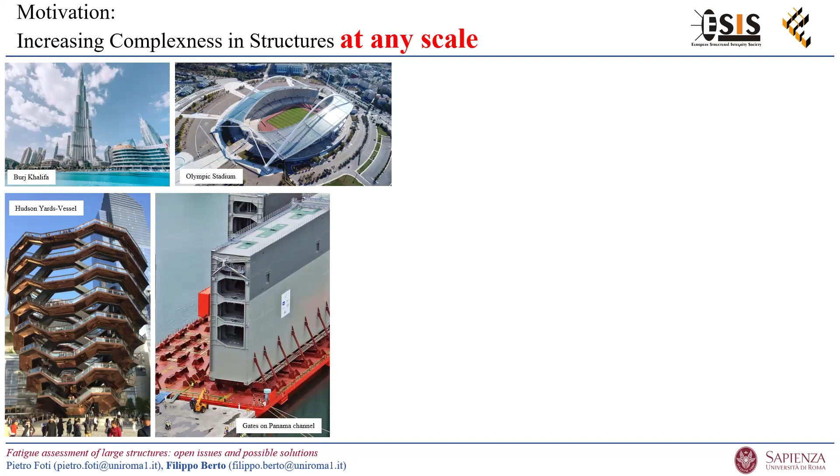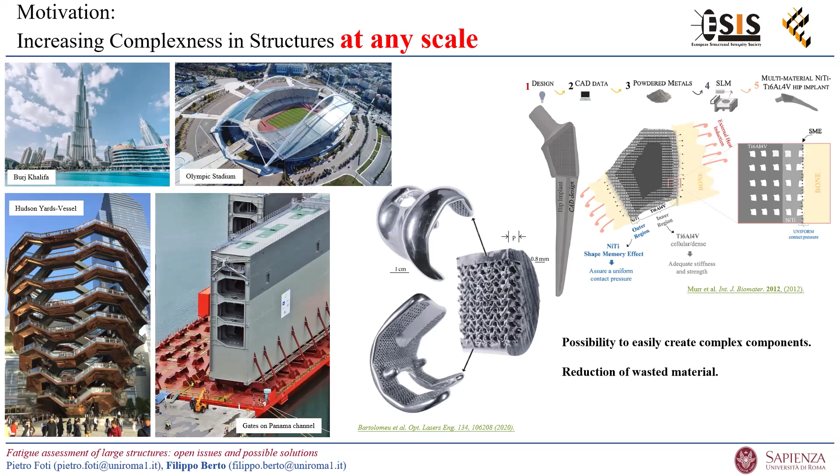Dealing with increasing complexity in structures, I want to mention that large infrastructure now needs to be designed against fatigue, and the standards are requiring this design always more to be efficient and more precise. And this is affecting any scale of the structure, from a very large structure to, for example, very small structures. So fatigue is spanning from large pieces of materials to very small material components. So what we need is the possibility to easily create a complex component, and we need a reduction of wasted materials and an efficient fatigue design for these structures.

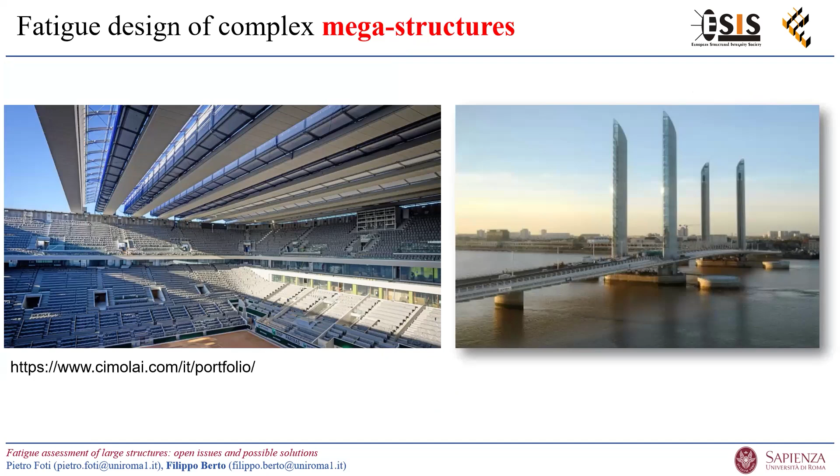So another example of large infrastructure in which I was involved recently was the cover of the Roland Garros stadium, the tennis stadium, that is now able to close the stadium when, for example, it is raining. And that movement is creating a lot of fatigue issues to the structures. And in that roof, there are more than 1,000 weldments to be designed against fatigue. Another example, together with Cimolai, is this large bridge.

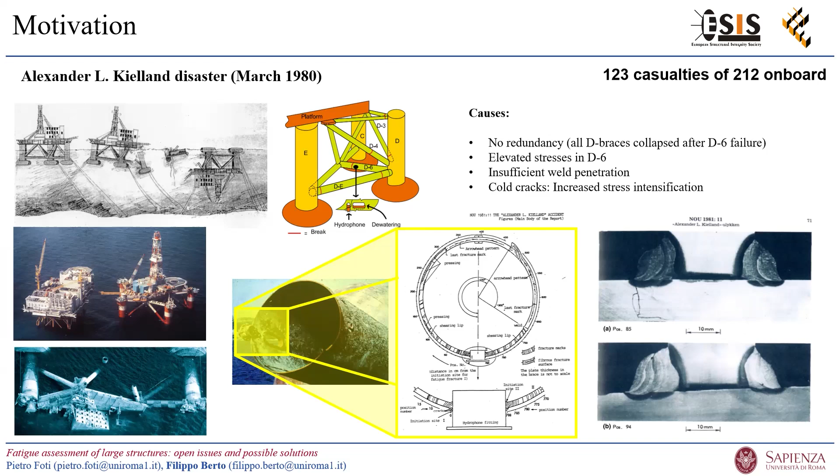And I want to mention also that fatigue is a local phenomenon. We had a very big failure in Norway in 1980, where a large offshore platform collapsed with more than 100 people who died. And this structure was 100 meters in length and collapsed only for the failure of a weld that was a few millimeters inside all the structure. So it means that fatigue design is a very specific and very local phenomenon that we have to treat with special tools that allow us to design the structure properly.

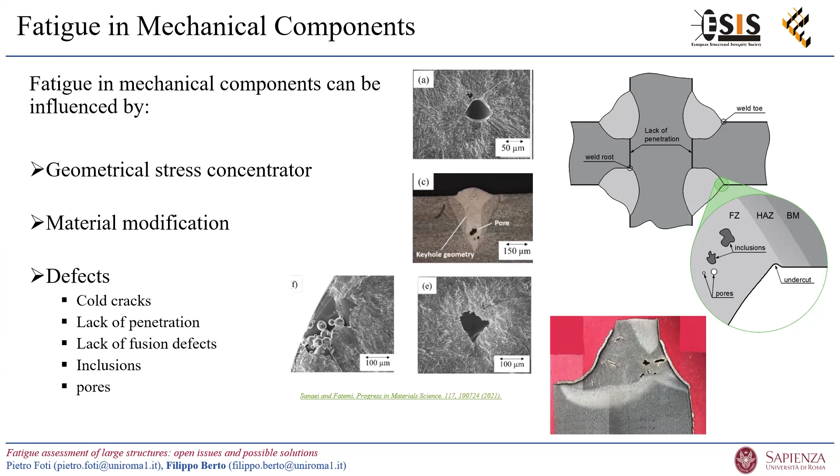Dealing with fatigue in mechanical components, of course, what we are saying for welded structures is also important for innovative materials, because we have the same identical problem, for example, in additive manufacturing, where we have cold cracks, lack of penetration, lack of fusion, inclusions, and pores that strongly affect the fatigue behavior of additive manufactured components. And so everything can be actually translated to those materials as well.

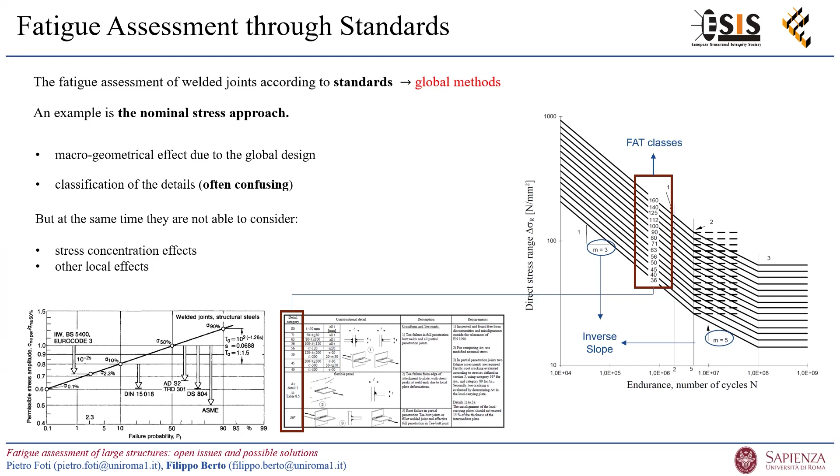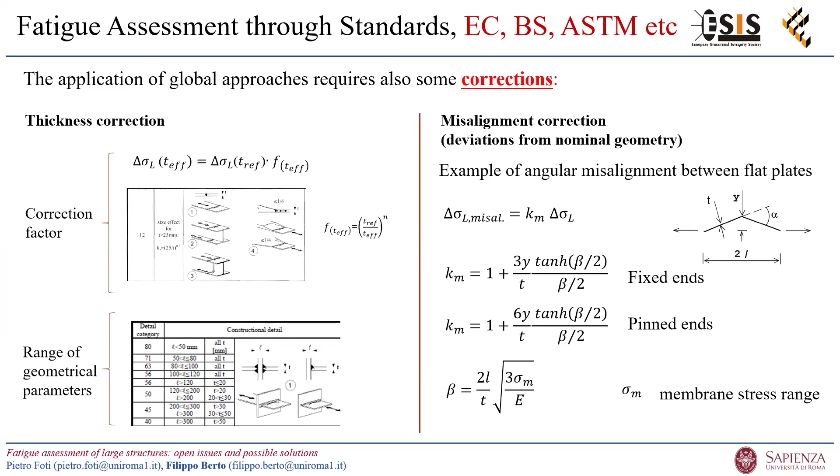Dealing with fatigue assessment through standards, I was involved, for example, in Eurocode 3, and we are almost 30 or 40 years behind the current research. So we are still designing components using a nominal approach, which is really conservative and bad in terms of fatigue prediction. So we are overestimating the fatigue behavior of large structures, and it is very difficult to find the categories of the joint that we want to design inside the Eurocode. It's almost impossible. If you have a complex structure, like, for example, the Roland Garros roof, all the welded components inside the structure do not belong to any category of Eurocode 3. Okay? And also we have a lot of simplifications and corrections that are mainly empirical and depend on the geometrical parameters of the structure. This is strongly inefficient and can create a lot of issues.

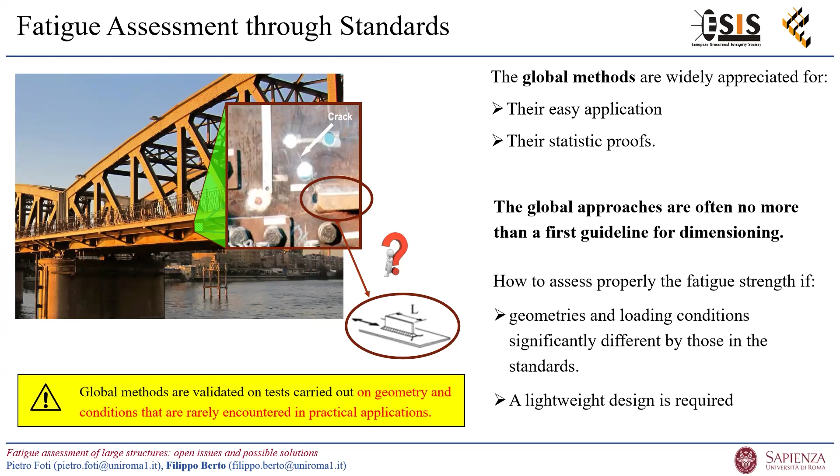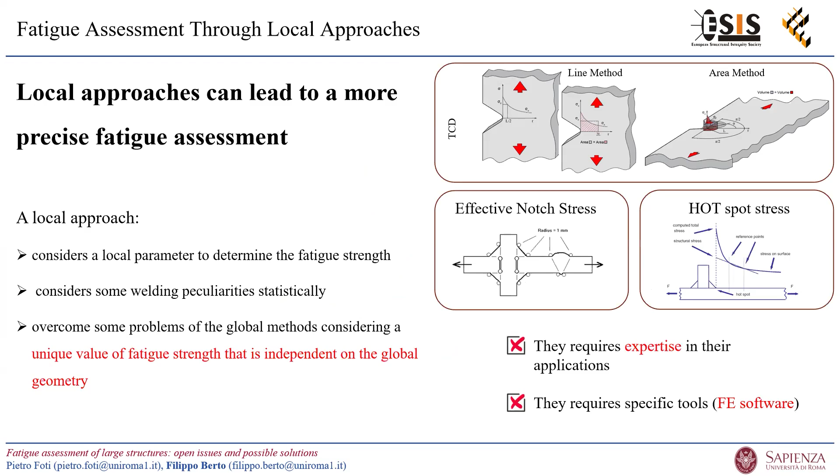I mean, global methods are, of course, widely appreciated because they are easy to apply, but of course, they have a lot of limitations because they do not consider the local geometry of the structure. I want to mention also that what we can do with the new local approaches is completely different. Of course, we need much more information for the application of the approach. We need to know the local geometry of the structure, but we have an accurate prediction that is independent of the global geometry, and we are also able to consider the real local geometry in a proper way.

I want also to mention that these local approaches were born mainly in Italy and, still in the United Kingdom and, for example, in Norway, they are using hotspot methods that are like in the cavern ages with respect to local approaches, because actually we are almost neglecting all of what is happening in the hotspot areas of the structures.

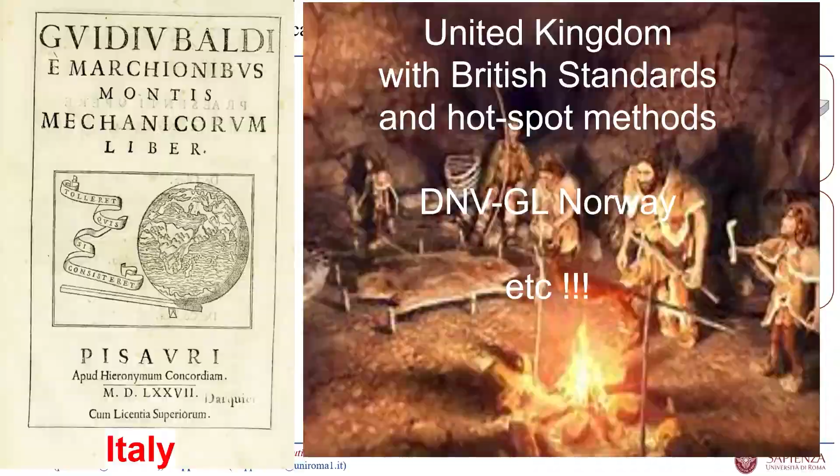Dealing with local approaches, I want to mention some recent findings about the strain energy density approach and how we have used it for predicting the fatigue behavior of large infrastructure. I will not go into the theoretical model, of course, for lack of time, but we have developed a method that is able to assess the fatigue failure of components based on the local strain energy density that is present at the weld toe or weld root of structures.

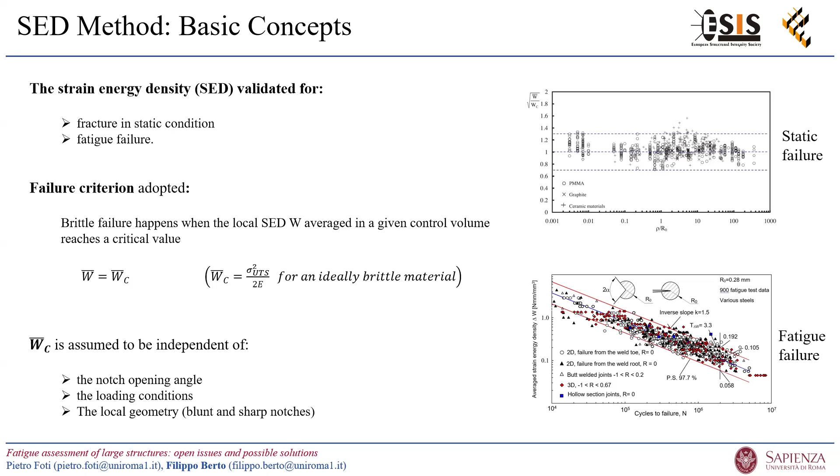And we were able to summarize all the fatigue data present in the literature, creating a master curve that now contains more than 900 fatigue data from welded structures. What is the advantage of this approach? The advantage is that you are able to consider the real local geometry of the structures, and this is also valid, for example, if you have additive manufacturing components. You are able to consider all the defects and also the non-homogeneities of the structures, and you are able to import the model directly from, for example, a scan model that we obtain from a real three-dimensional structure and obtain the final results with the coarse mesh.

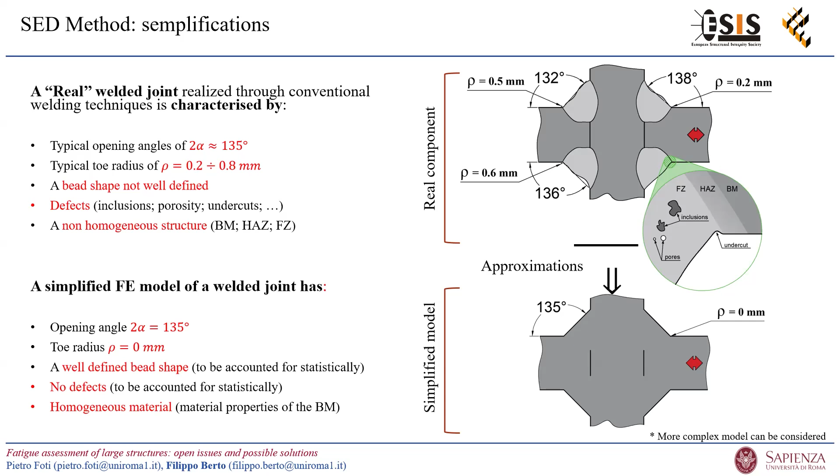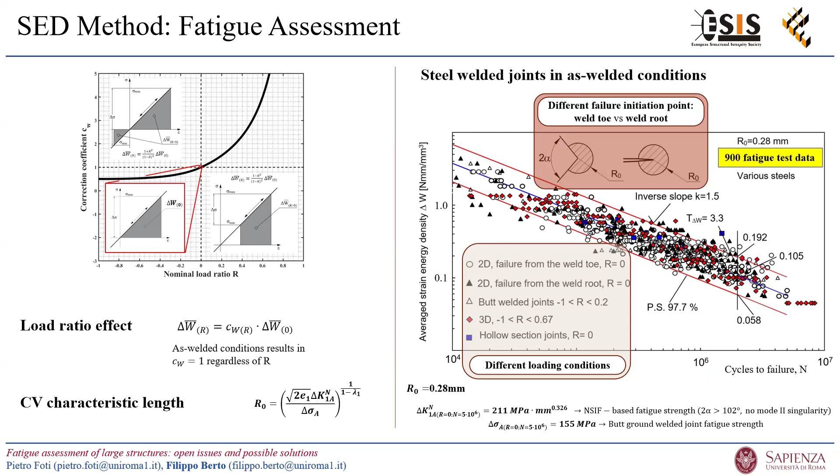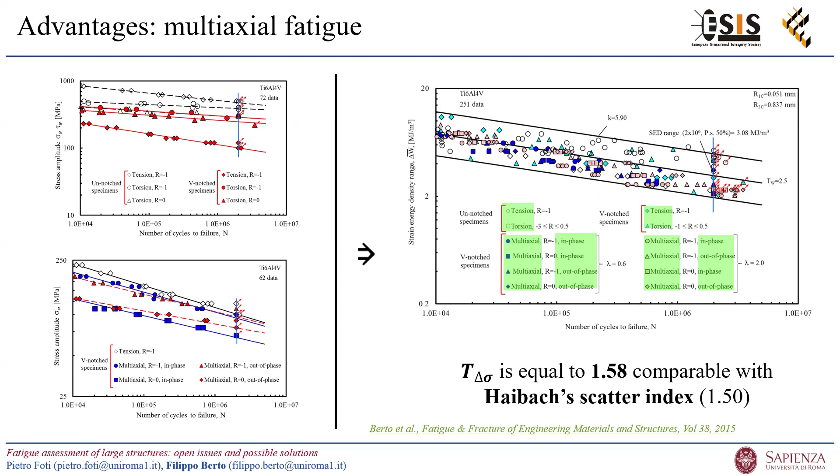The method is also sensitive to the mean stress effect, so we are able to take into account the load ratio effect, which is an important parameter affecting the fatigue life of welded structures. This is an example where we have summarized more than 200 data from titanium alloys, with data from different mean stresses under multi-axial loading conditions, and we summarize everything in the same scatter band with the approach, which proves to be able to take into account the nominal load ratio as well.

If you consider the standards in force, especially for welded structures, we have Eurocode, British Standard, the DNVGL, and International Institute of Welding suggestions. The deficiency of these approaches is what I mentioned before: in the majority of cases, we are over-conservative in the fatigue prediction. And second, it is actually difficult to find the category of the joint inside the standard, because in large infrastructure, for example, in tubular or offshore infrastructure, none of the joints belongs to the categories that are summarized

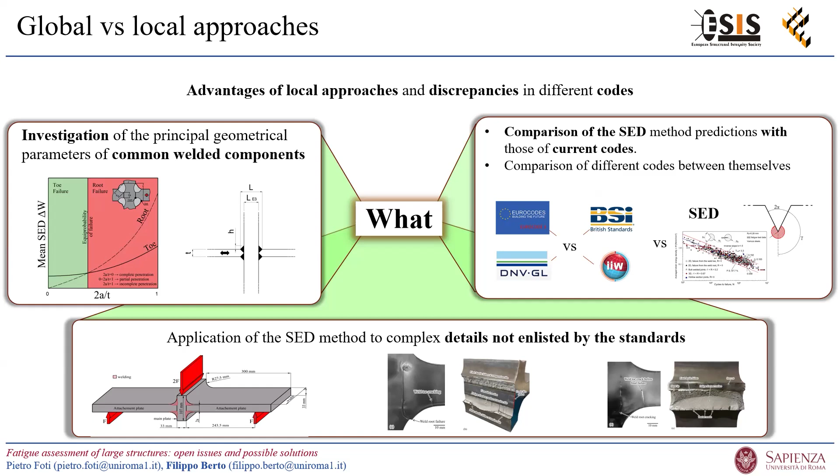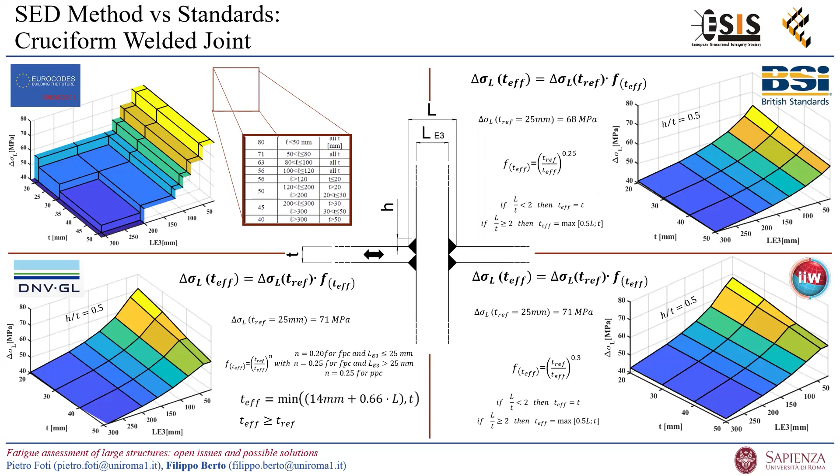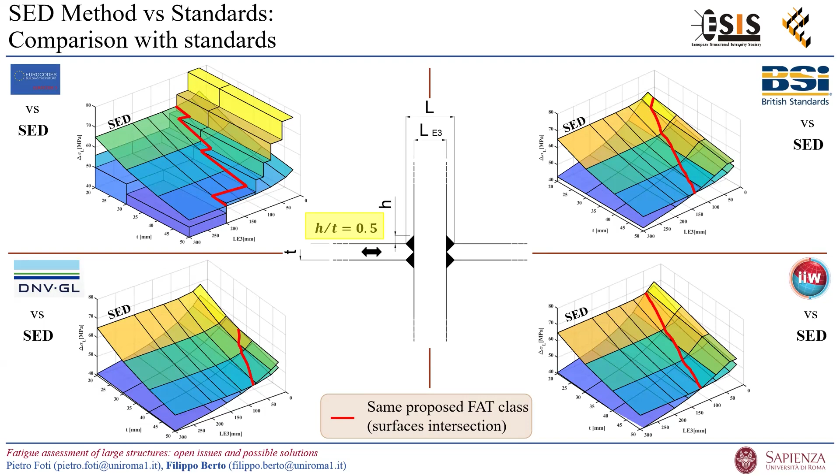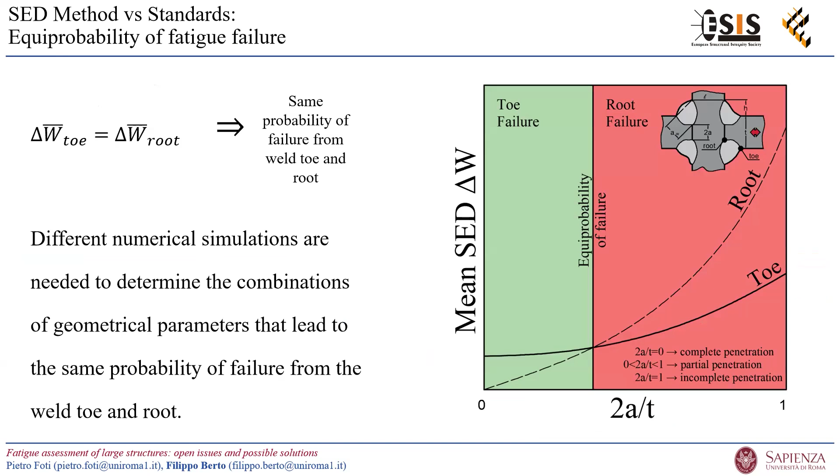in the standards. What we have done was to compare different standards together, for example, Eurocode, the DNVGL, and other standards, and try to apply the local strain energy density, which is represented by the red line in this three-dimensional graph. So you can see that in some cases, the standards are over-conservative. In other cases, they are not conservative at all. And so the local approach is able to find a compromise between all the standards in force, with an efficient design of the welded structures. The local approach is also able to detect whether the failure will happen, for example, at the root or at the weld toe, which is quite difficult to do with the standards in force based on the nominal local stress.

We have also applied the strain energy density approach to, for example, turbine blades. And we have applied the method to different kinds of loading and also multi-axial conditions, showing that we were able to summarize all the data from different loading conditions in the same scatter band after we define the critical radius or the critical material properties for this welded structure.

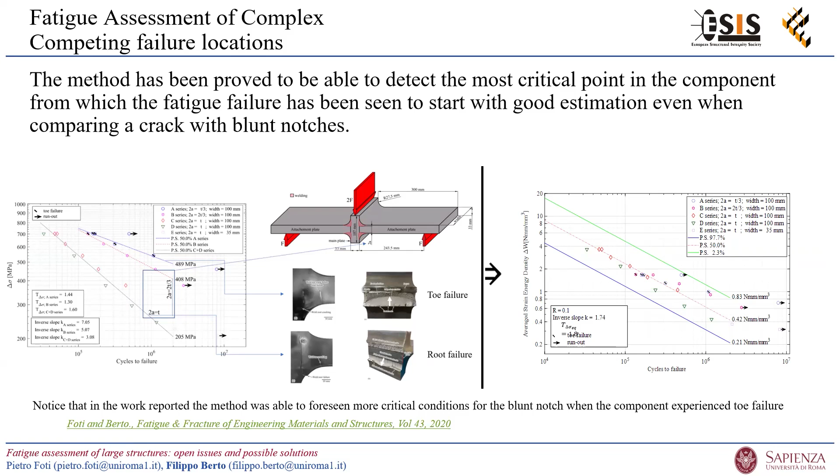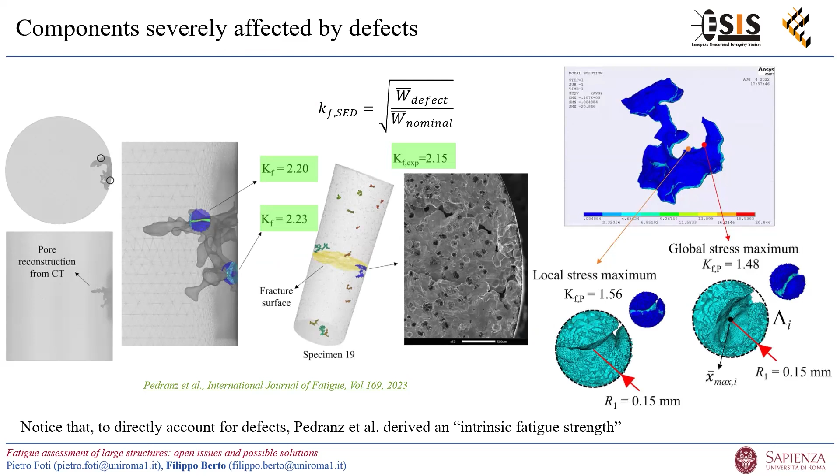What I mentioned before is that if you consider the defects that we have in additive manufacturing, we are able to reproduce a structure, for example, with a 3D scan or with a computed tomography of the structure, and after that import the model with the correct dimension of the defect and size inside the finite element method, and apply with the coarse mesh the strain energy density approach that is able to predict the final fatigue failure. We are working on this topic quite consistently now.

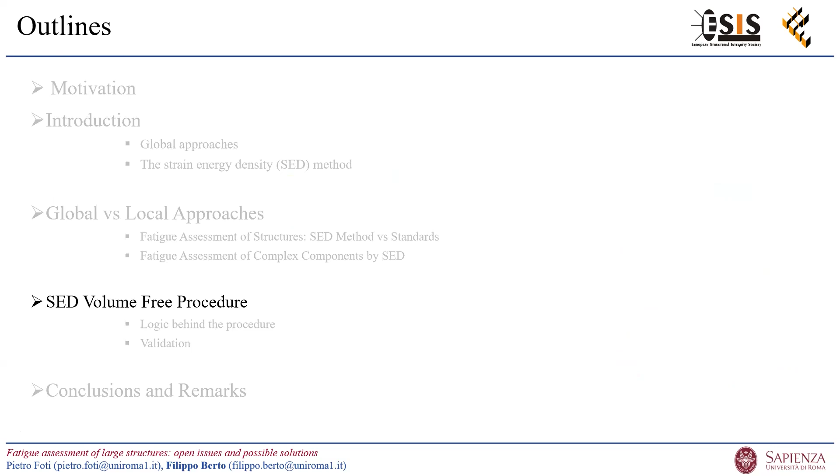I want to mention that one of the limitations of our local approach, which is the strain energy density approach, is the need of meshing the structure while considering the volume. What we have done was to create a method that is now volume free. So we are able to have the value of the strain energy density only from some elements in front of your critical parts, without the necessity of actually modeling the control radius and control volume in the proximity of the notch, discontinuity, crack or defect. So this makes the approach very efficient, and we can solve the problem with the coarse mesh. We have validated this method with many cases, showing small discrepancies with the fine mesh.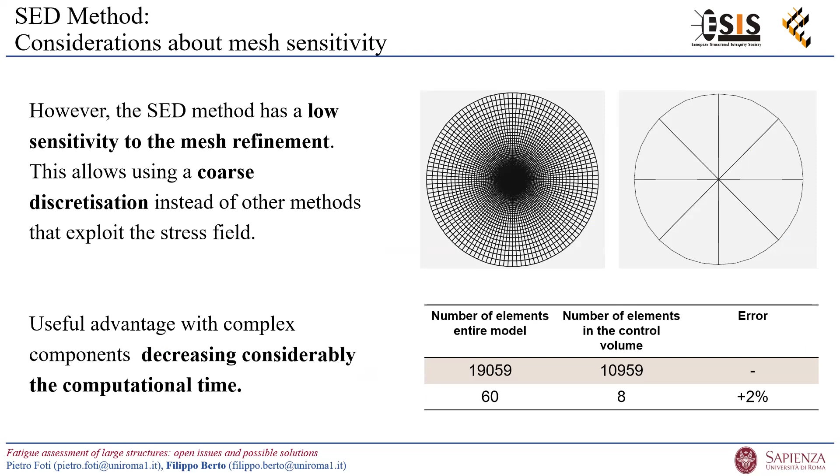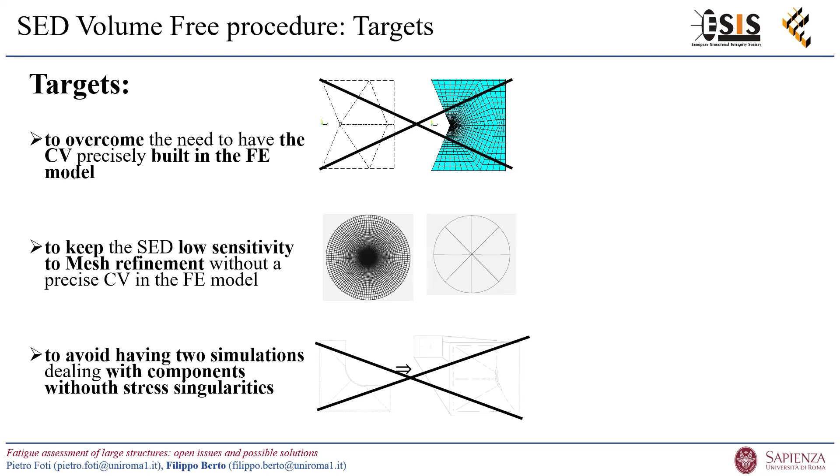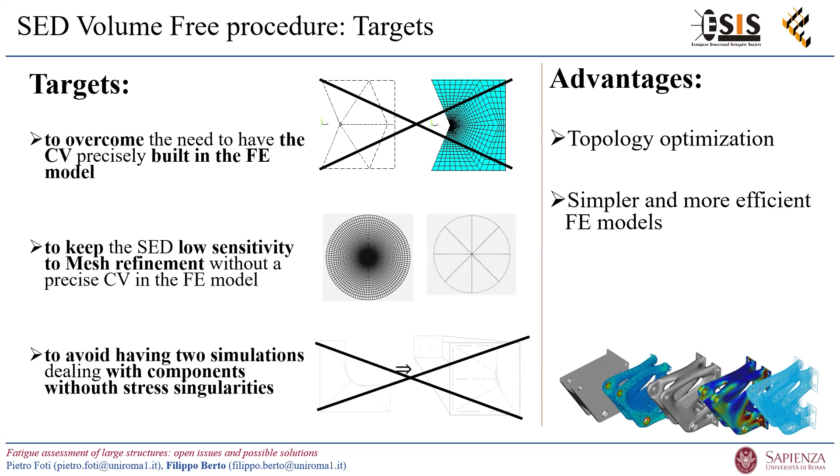The target is then to overcome the problem of complex meshes, avoid the mesh refinement, and avoid double simulation to take into account stress singularities. The advantage is that we are able to automatically have a topology optimization of the structure that is very efficient, for example, for additive manufacturing components or 3D printing, simpler and more efficient models, and easier application of the approach. We have applied this method to the design of the Panama gates.

That was a large project developed between 2013 and 2020 together with an industry called Cimolai in Italy. They designed the 8 Panama gates that are now present in the Panama Canal. In that case, we had a lot of issues because they wanted the fatigue prediction of each weldment, and every gate had around 1 million weldments and more than 100,000 notches. So we developed an artificial intelligence or machine learning approach based on the strain energy density to automatically compute the fatigue assessment of the structures.

I cannot give much detail about the software, which is the intellectual property of the industry, but they are using this software to design complex structures. The advantage of the software is that it is able to recognize previous designed weldments and is able to avoid useless calculation when it finds a similar geometry that it has already calculated. So it is able to optimize and efficiently compute a lot of welded structures in one afternoon, for example.

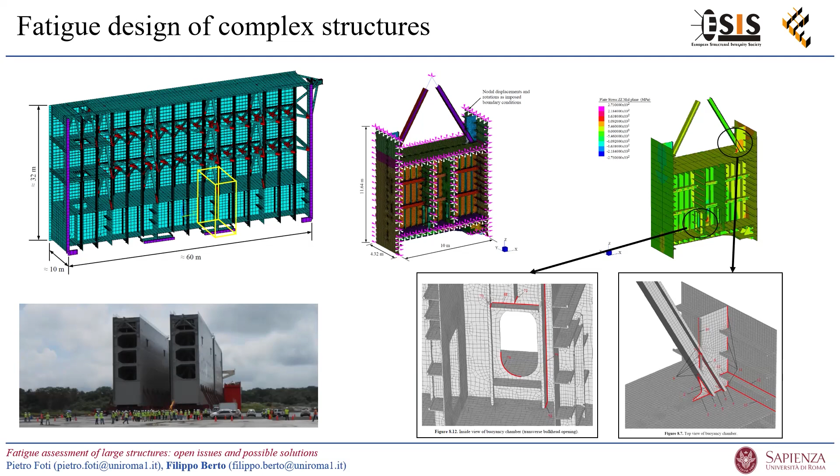If you want a comparison, you can think that the most critical welded joints of this structure were designed by common engineers with common tools in 6 months for one gate. And now we are able to solve the whole gate in 1 to 3 hours of computational time. Another work where I was involved was the MOSE gates, and in particular the largest gate, the Malamocco gate, that has the same issue as the Panama gate. This is also a running project that will be presented at the Association of Maritime Engineering and Offshore Structure in Italy, in Catania, next January.

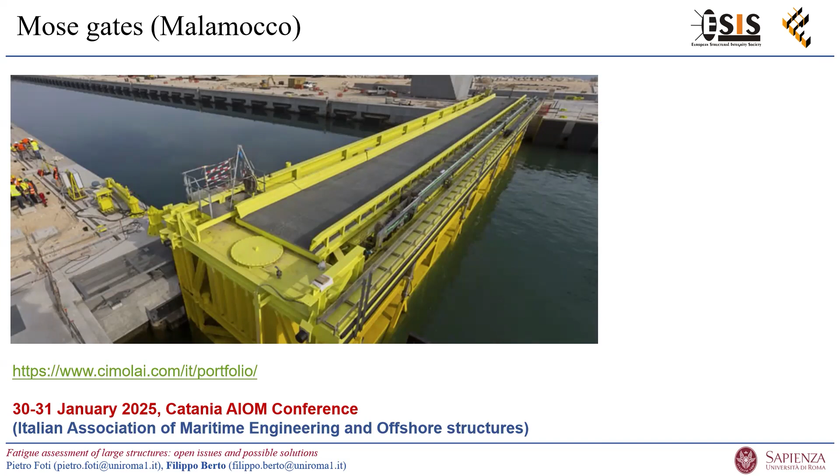Another important thing that I mentioned is that data-driven methods or machine learning approaches are becoming powerful nowadays. In particular, we can use them in 2 different directions. We can use them for structure to property design, so it is called forward design: given a designed structure, we can extract the property of the structure. Or, the most interesting aspect, having some target properties that we want to reach, we can obtain the geometrical features that are able to give us these targeted properties. This is called inverse design. 95% of the studies up to now are only on structure to property design, and we still have to exploit a lot about inverse design, which is still at the beginning phase of this approach.

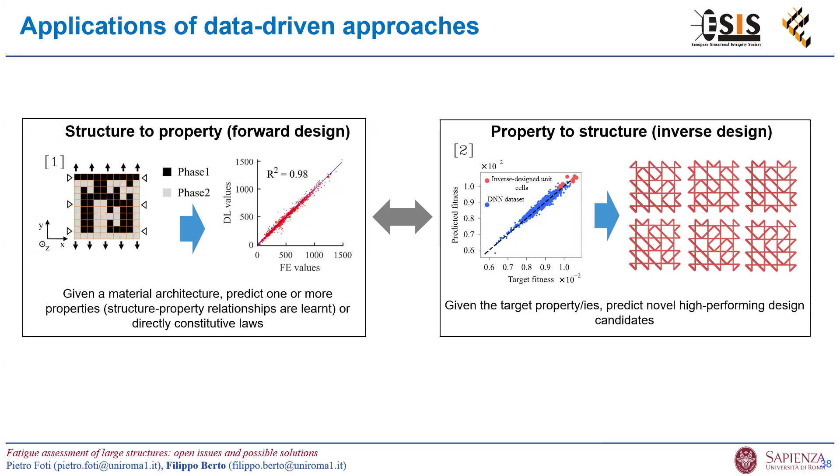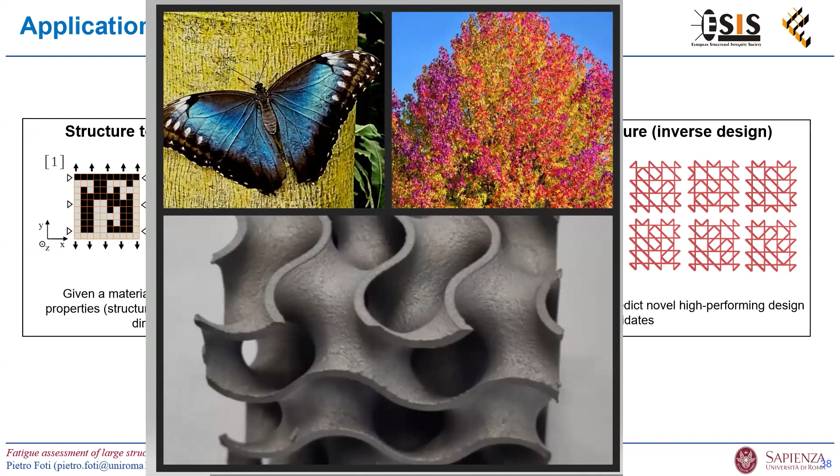I want to mention that this is studied intensively in our recently funded project, the ERC Advanced Grant, where we are trying to take inspiration from nature to model super fatigue-resistant structures. Some preliminary results of these structures at different scales have already been presented, and in particular we are able to model the strength-toughness paradox, taking inspiration from nature. This is a paper in collaboration with Robert Ritchie, where we took inspiration from different natural structures, and we 3D printed titanium scaffolds infiltrated with magnesium to increase in parallel strength and toughness, which are usually conflicting properties, and we are able in this way to increase both.

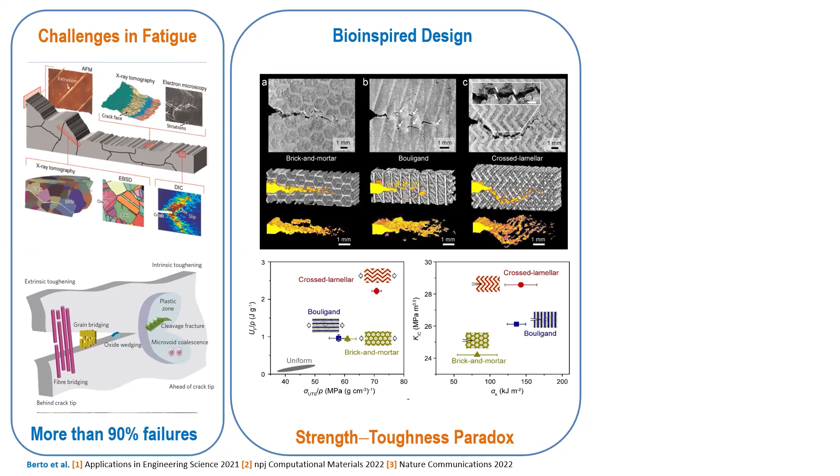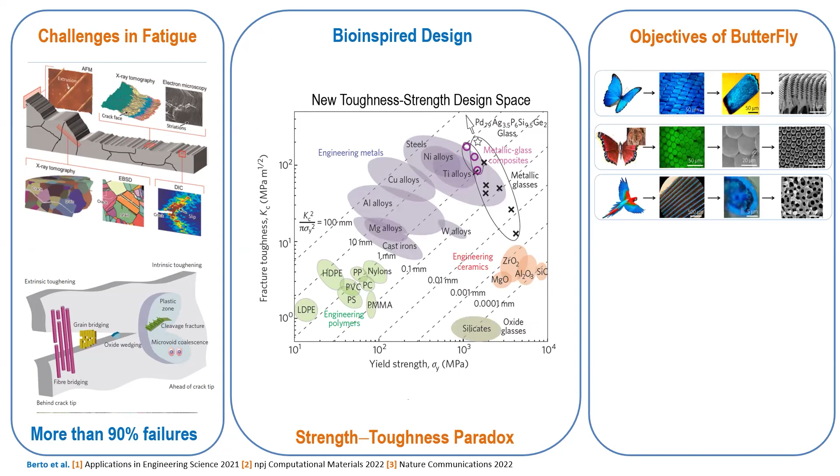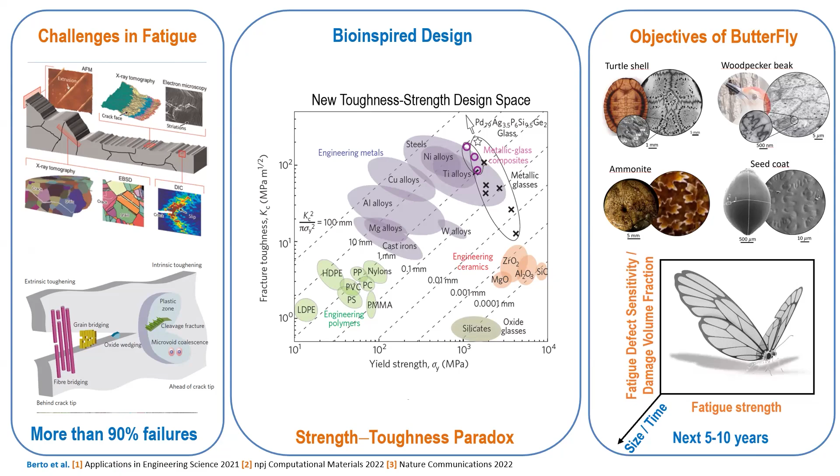In fact, we are able to control the crack initiation and propagation of the structure, and we are able to drive the crack path to the final failure as we want with this kind of structure. This allows us to design a new generation of materials, and the aim of ButterFly, which is my project on fatigue design, is the same: taking inspiration from nature under fatigue loading, we want to design new fatigue super-resistant structures, and this is what we are doing nowadays within this project. So you will see some results of this project published soon.

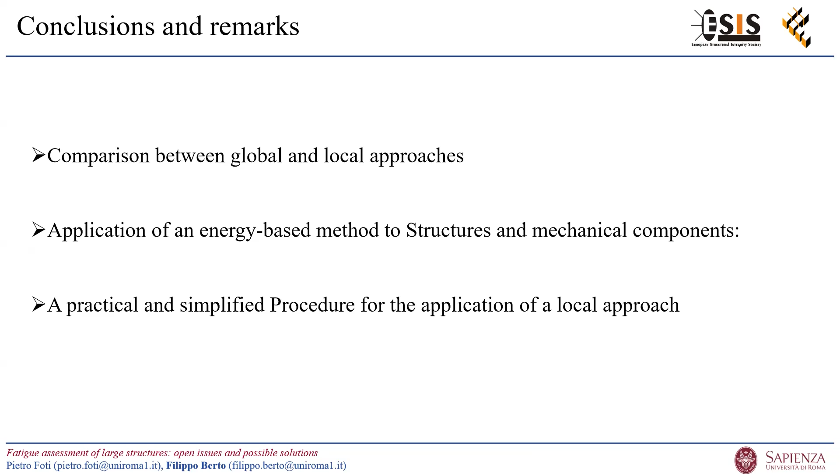Finally, I want to give some conclusions. I think I stayed inside my schedule time. We gave a comparison between global and local approaches. We explained the advantages of the local approach with respect to global approaches, and in particular the advantage of the energy-based approach that allows the use of coarse meshes to be efficient with the computational models. And after that, a practical way to simplify the procedure of the strain energy density without modeling the volume. And some insight, and I mean philosophical discussion, about future possibilities, about topics linked to machine learning applied to material design and structure with inverse design.